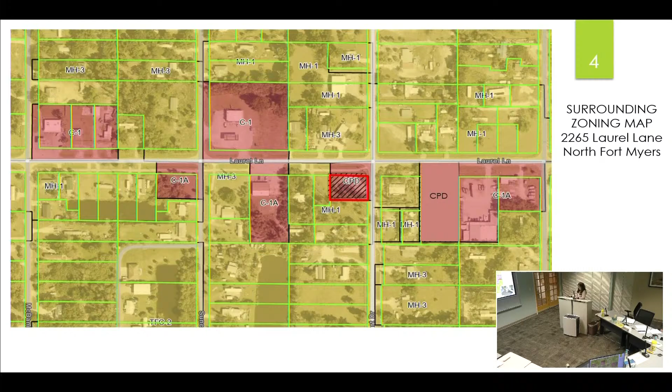The property has a future land use classification of suburban, as shown in the gold. The surrounding properties also have the same future land use classification. Surrounding zoning consists of MH1 and C1A to the west, MH3 and C1 to the north, MH1, CPD, and C-1A to the east, and MH1 to the south.

I did an exhibit for proximate commercial uses along Laurel Lane, which is identified as a major collector road in this area of Suncoast Estates. Commercial uses have been located along Laurel Lane to serve the community through rezonings, both conventional and planned development. Nearby uses consist of gas stations, convenience stores, food stores, and markets. There's a car care center and a roofing contractor, and several properties with commercial zoning that are vacant at this time.

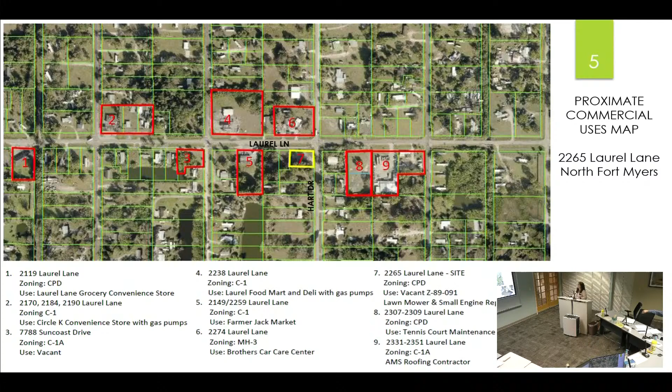AMS Roofing? Yeah, that was adjacent to this site, right? No, was it that, or was it adjacent to another one? It was one that we did. Yes, this one, I rezoned. Tennis court maintenance facility, that's us, we did that one too. That was me as well. Same team. So this little cluster of lots is turning into a node there. Yes, it is.

The applicant did propose a very limited schedule of uses, removing the previous use of lawnmower repair shop. He intends to develop the property as a food market, which will include carry-out prepared foods. The primary use is food store group 1, with ancillary uses of restaurants limited to carry-out only, an ATM machine, signs, fences, and essential services.

The master concept plan has been designed for the proposed use with the neighborhood and the existing neighbors in mind, and to comply with the requirements of the Land Development Code to the maximum extent possible. The lot is only 0.33 acres, which is 14,500 square feet. The proposed building is 2,000 square feet with a maximum height of 30 feet.

Is the plan for like just a little neighborhood grocery market? Absolutely. We did provide a minimum of 40% open space, which is double the 20% required for a small commercial development. Access to the property is going to be from Hart Drive, with the driveway located as far south of the intersection as possible. The building is located along the west property line and will have 2 public facades, one facing Laurel Lane and one facing Hart Drive. A total of 8 parking spaces are provided, along with pedestrian access internal to the site and along both Laurel Lane and Hart Drive.

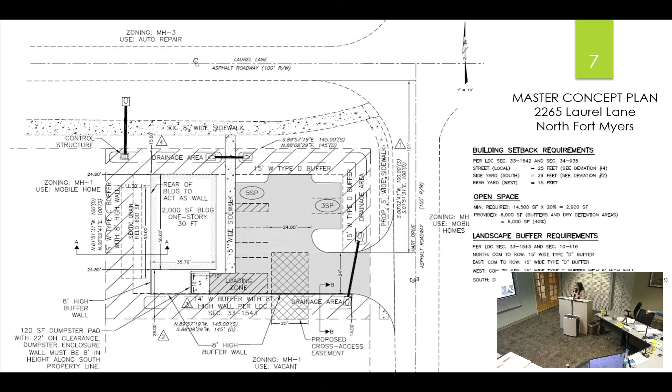That concludes the presentation of the master concept plan. I want to turn this over to Dean, who's going to talk to you about and present the traffic impact study, the drainage plan, and utilities for this site. And then I will wrap up with the Lee Plan compliance and answer any questions you may have.

Good morning, Dean Martin with TDM Consulting. I've previously been accepted as an expert in civil site design and would like to be considered again today. Yes, please proceed. Great, I want to briefly discuss traffic, drainage, and utilities.

As previously stated, we are proposing a full access driveway on Hart Drive. It's a full access connection. Hart Drive is a county maintained collector with a posted speed limit of 30 miles an hour.

Per the 11th edition of the ITE trip generation manual, using land use code 851 for convenience stores, the property generates 140 peak trips in the AM hour and 110 in the PM peak hour. But using pass-by allowances allowed by Lee County Land Development Code, we reduce the trips actually generated on the road down to 69 for the AM peak and 54 for the PM peak.

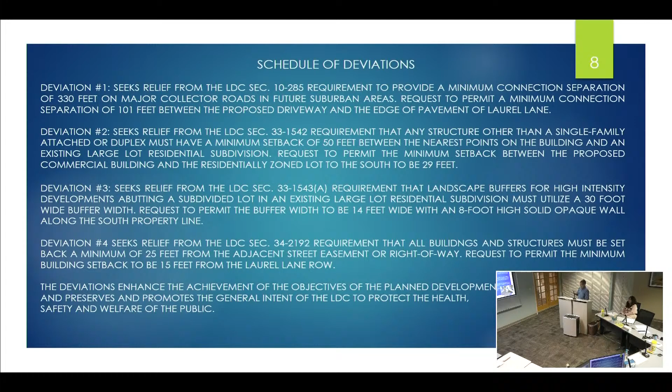I imagine you'll get a fair amount of foot traffic too, given the composition of that area. I did a site visit yesterday, and it seems as though given the use that's requested, a number of the residents in the area might just walk over.

I agree, and I think these numbers are a little exaggerated based on the ITE manual because these are done in more urban environments typically. So I think 140 trips, 110—if we generate that much, I think he's going to need to go a second story or expand because...

Well, you did a very conservative evaluation at 2,240 square feet. It's actually smaller than that. Correct, we didn't change it. So it would be a little bit less, not substantially less, but a little less based on the current square footage of 2,000.

It'd be down to maybe 120 and 100 for the peaks, and below that around 60 and 50. Given the character of the area, it seems like you'll have a fair amount of foot and bicycle traffic. And there's a nearby bus stop, so it's easily traversed by pedestrians and bicyclists, yes.

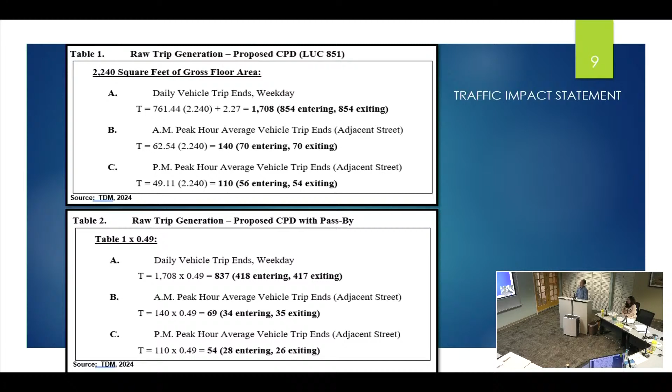As shown on the MCP on the screen, all stormwater runoff from the impervious surfaces will be routed to the proposed interconnected dry detention areas. Once water quality is achieved, we have proposed a control structure at that location that discharges to a roadside swale existing along Laurel Lane. We believe we'll be meeting the water quality requirements for the county given these interconnected detention areas.

If we don't, we'll provide supplemental underground storage chambers to supplement the above ground system. When is that determined? During the DO, it depends on several factors: soil storage, where the water table is, and we just haven't gotten that far during zoning. But we think this is enough.

Right now the plan is perimeter dry detention areas graded to this control structure, which then outfalls onto the roadside swale. Correct. Even if we do the underground chambers, they'll be in the parking lot, so the first flush will go into the chambers, and then it'll outfall into the surrounding area, complementing and supplementing the surface drainage.

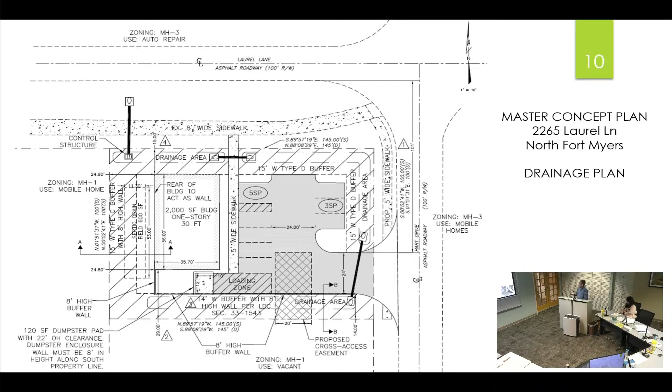As stated earlier, we are proposing a septic system for this site because the nearest force main is 2,600 feet south on Zoysia Lane, or roughly the same distance west over to Old 41 on this side. So it's pretty far away.

It's more than a quarter mile, more than half a mile actually. So we need to propose the septic system, and as soon as we get access to public sewer, we would love to abandon it and tie into it, but that's just not feasible at this point. The estimated demand is pretty low, 400 gallons a day based on 2 restrooms inside the store.

For potable water, there's a Lee County Utilities potable water main on our side of Laurel Lane that we'll tie into for domestic water. And the building being so small will not be sprinklered at this point. That concludes my presentation, unless you have any questions. I don't, thank you. Okay.

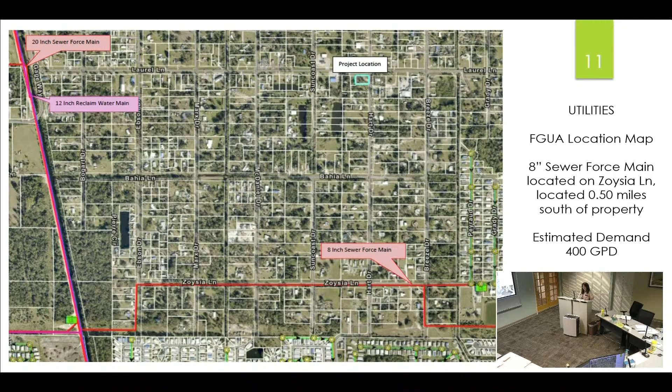Veronica, you had mentioned that there would be a condition that the west-facing wall on the side of the building would act as a buffer wall, with no doors or windows. I was looking at the list of conditions and did not see that included. Did I miss it? In the conditions, in the staff report? Oh, under environmental, okay. You found it quicker than I did. Okay, guess I wasn't expecting to see it there.

The site does comply with the comprehensive plan. This site does have a future land use classification of suburban, which is predominantly residential but does permit commercial uses to serve the local community. Nearby uses include both residential and commercial, as previously shown on the proximate commercial uses map.

Amending the CPD to permit the proposed use of food market is consistent with policy 1.1.5, objectives 2.1, development location, and 2.2, development timing, promoting contiguous and compact growth patterns to contain urban sprawl, minimize energy costs, conserve land, water, and natural resources, and direct new growth to areas where adequate public facilities exist.

Policies 2.2.1 and 2.2.2 evaluate rezonings on the availability of adequate road networks, central water and sewer lines, community services and facilities such as schools, EMS, fire, and police protection, and other relevant factors that would affect the public health, safety, and welfare of the community.

Both Laurel Lane and Hart Drive are major collector roads. The addition of the development will not degrade the level of service of the roads, which you heard from Dean. Fire, police, and EMS are located within 4 miles of this site. Public transit is located on Laurel Lane, and public parks and schools are within proximity to the site.

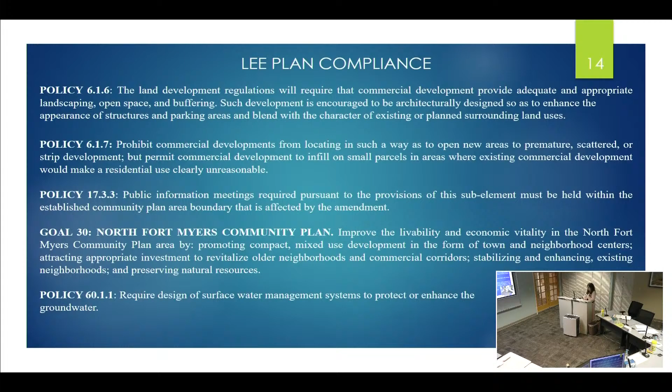Suncoast Estates is one of those older communities with a mix of mobile homes and commercial uses. It has been identified as an opportunity zone, the purpose of which is to spur economic growth and job creation in low-income and distressed communities that need revitalizing. Amending this CPD to permit a food store in this community does create employment opportunities. This is consistent with Lee Plan Goal 30.

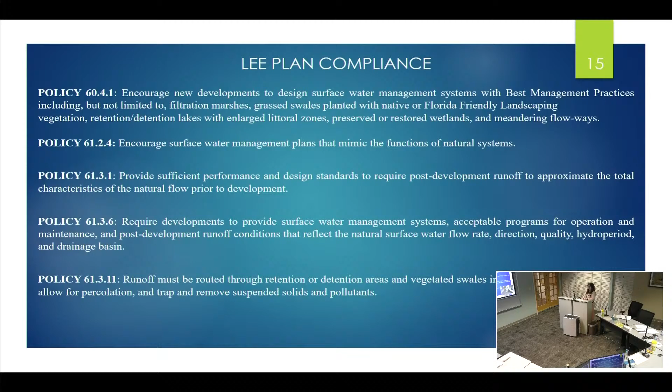This site will be designed utilizing best management practices for surface water management at the time of DO permitting. The property is not located in a flowway, nor does it contain wetlands. This subject property is under 1 acre in size, so it will be developed as a small project, which will not require permitting through South Florida Water Management District. Paving, grading, and drainage plans will be included with the site construction plans for the DO and reviewed by staff for consistency with the requirements of the Land Development Code, the Lee Plan, and any other regulatory agencies.

This is consistent with Lee Plan policies 60.1.1, 60.4.1, 61.2.4, and so forth. In conclusion, we believe the applicant has proven entitlement to this amendment request. The request does comply with the Lee Plan, it meets the Land Development Code and other applicable county regulations, or qualifies for deviations.

It is compatible with existing uses and planned uses in the area. The access is sufficient to support the proposed development intensity. The expected impacts on transportation facilities will be addressed by existing county regulations and conditions of approval. It does not adversely affect environmentally critical or sensitive areas and natural resources. It is served by urban services.

In addition, for the planned development, the mix of uses is appropriate at this proposed location. The recommended conditions provide sufficient safeguards to the public interest and are reasonably related to the impacts expected from the proposed development. The deviations requested do enhance the achievement of the objectives of the planned development, and they preserve and promote the general intent of the Land Development Code to protect the health, safety, and welfare of the public.

That concludes my presentation. I will provide the revised master concept plan to you by end of day today, and I can answer any questions you might have.

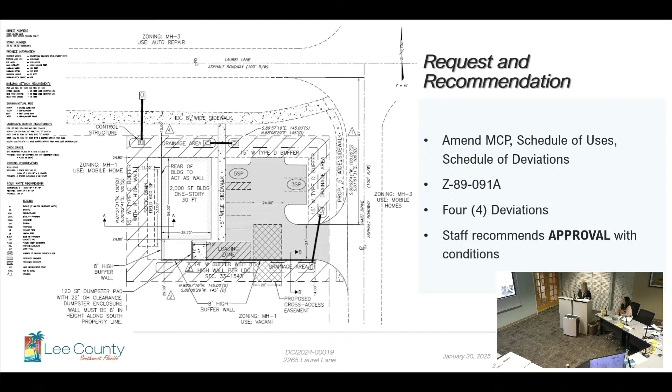Some background information on the property. The subject property, again, located at 2265 Laurel Lane in North Fort Myers. It consists of one strap number within the North Fort Myers Community Plan area. It is within the suburban future land use category and is currently zoned commercial plan development.

A little history on the parcel. The subject property is located within the Suncoast Estates platted subdivision, an older mobile home park, originally zoned by a special permit for a trailer subdivision by Resolution Z-62-039. As Veronica indicated, it has been identified as an opportunity zone, and historical uses of the Suncoast area are for mobile home residents. Permitted commercial uses exist along the major roadways within Suncoast Estates, alongside existing residential neighborhoods, including along Laurel Lane.

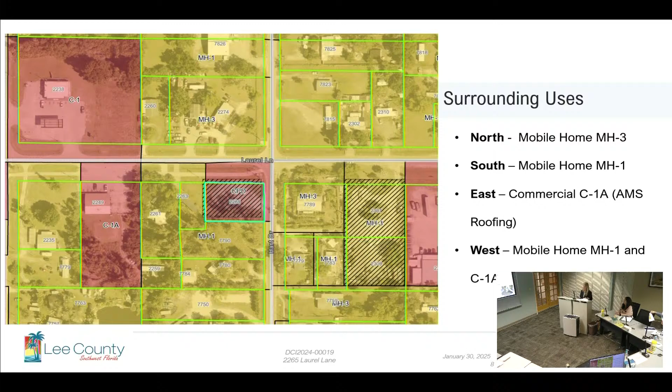Some surrounding uses to the property. They are near existing residentially and commercial zoned properties. Lots abutting the property to the south and west are zoned mobile home MH1, and 2 lots to the west of the subject property at 2249 Laurel Lane are zoned commercial C1A and are developed with a convenience store already. Properties to the north across Laurel Lane and east across Hart Drive are zoned mobile home MH3.

For the plan development amendment criteria covering Lee Plan LDC section 34-145, the following slides will demonstrate how the applicant has met the listed criteria. As previously mentioned, the property's future land use designation is suburban, part of the future urban and suburban areas. Pursuant to Objective 1.1.5, the project site is in a designated area for varying intensities that provide for a full range of urban activity, and commercial uses are permitted in the suburban future land use category to serve the local community, with nearby uses including both commercial and residential. The applicant has provided a master concept plan that depicts the conceptual development and includes proposed buffers and development standards intended to ensure compatibility with those surrounding uses.

Pursuant to Objective 2.1, the proposed amendment will allow development of an infill project that promotes compact growth patterns. Objective 2.2 and Policy 2.2.1 discuss new growth in future urban areas where adequate public facilities exist. As Veronica mentioned, the property is located along the 2-lane collector road of Laurel Lane. Existing infrastructure of water and sewer is in place, and utilities are available to the site. Adequate public facilities, including fire, police, public parks, solid waste, and utilities, are available to the site, and there are also public schools and parks that serve the property.

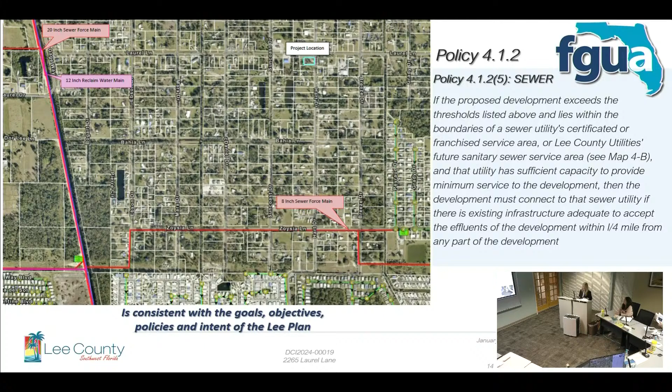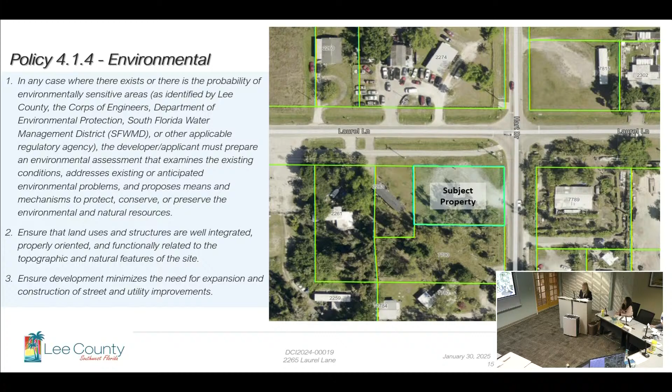For 4.1.4 environmental, the applicant has provided the required protected species survey and affiliated environmental maps. The subject property is cleared and routinely mowed and has been surrounded by development, providing sufficient evidence that no environmentally sensitive areas exist.

For objective 5.1.5, the applicant's MCP was designed to account for the existing surrounding residential uses and protects the residential areas from any uses that are potentially destructive to the character and integrity of the residential environment.

The LDC does provide buffer, setback, screening, and architectural requirements to minimize negative impacts associated with commercial uses abutting a residential neighborhood. The applicant has requested a deviation from LDC section 33-1542, which requires a minimum 50-foot setback for commercial structures abutting residential uses, to allow for a 29-foot setback to the south abutting a large lot subdivision.

In addition, a deviation from LDC section 33-1543A, which requires a 30-foot buffer width when high-density development abuts an existing large lot subdivision. They'd like to allow a 14-foot buffer along the south property line with an 8-foot high solid opaque fence, with all required vegetation on the outside of the fence.

The applicant has requested a 15-foot setback to the west, and county staff has recommended a condition that prior to development order, the MCP must depict that 15-foot type C buffer and a wall on the western side of the lot, with no windows or doors along the west facade of the building, ensuring an enhanced buffer to that residential use to the west.

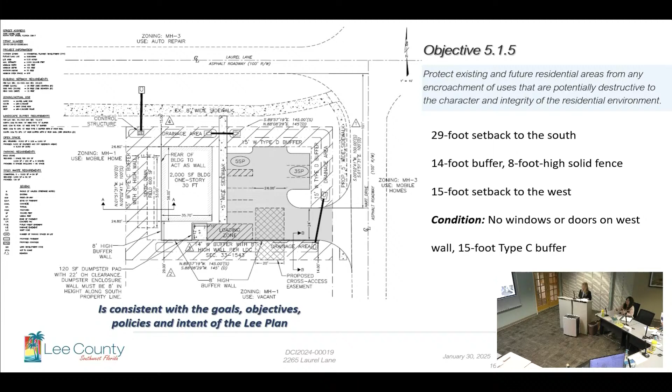Goal 6 of the Lee Plan for commercial land uses seeks to permit orderly and well-planned commercial development at appropriate locations within the county. As already established, the property is located within an established neighborhood with nearby existing commercial zoning districts, including CPDs, C1 and C1A. Access to the proposed development will be facilitated through one access point on the county-maintained major collector roadway of Hart Drive.

The Lee County DOT did provide a transportation analysis report stating the project is not anticipated to adversely affect the surrounding roadway system. Again, adequate landscaping and buffering will be provided at time of development, and urban services such as potable water, sanitary sewer, fire, EMS, and police protection are available to serve the proposed development.

Reuse water is available to serve? I'm sorry? Did you say reuse water? No, I thought you said potable. Yeah, no, potable water and sanitary sewer. Potable water. Yeah, potable. Okay.

For Goal 30, regarding the North Fort Myers Planning Community Plan area, as previously discussed, properties are located in Suncoast Estates, an older neighborhood comprised of a mix of residential mobile homes and commercial development. Suncoast has been identified as an opportunity zone, and the proposed development is an infill project promoting compact and mixed-use development, investment to revitalize the neighborhood, and further provides for mixed development. The business creates employment opportunities for the surrounding community, consistent with Goal 30.

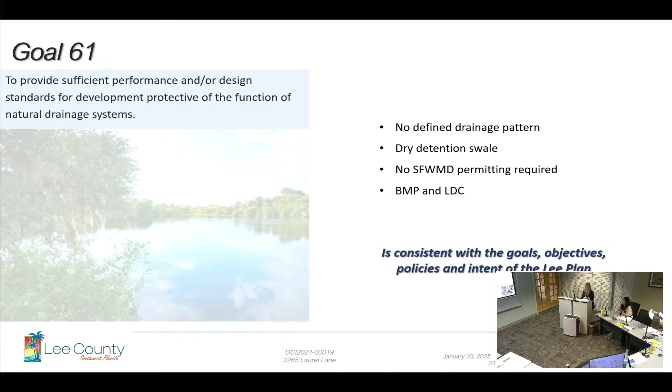For meeting the code and other applicable county regulations, the applicant has acknowledged that at the time of development, land development code and other applicable county regulations will be required and considered. The applicant has requested and justified the following 4 deviations for plan development.

Deviation 1 seeks relief from LDC section 10-285, which requires a minimum connection separation of 330 feet on major collector roads in a future suburban area, to allow a minimum connection separation of 101 feet between the proposed driveway on Hart Drive and the edge of pavement of Laurel Lane. Laurel Lane is located along the north side of the property, and the subject property is only 100 by 145 feet, making compliance with this 330-foot connection separation impossible.

Historic aerials indicate a previous driveway located as far south on Hart Drive as Laurel Lane, and there are only other residential driveways in proximity to the subject property on Hart Drive.

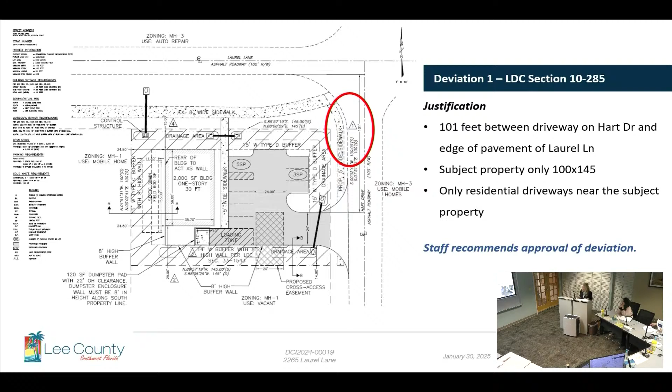LCDOT staff requested a cross-access easement to the property directly south to facilitate cross-access in the event that property is rezoned for commercial use in the future. The proposed cross-access easement will provide an interconnection and reduce access points on Hart Drive.

Staff did recommend approval of this deviation. Deviation 2 seeks relief from LDC section 33-1542, which requires any structure other than a single-family, two-family attached, or duplex, or its associated accessory structures, to have a minimum setback of 50 feet between the nearest point of the building and an existing large lot residential subdivision. The request is to allow a minimum setback between the proposed commercial building and the residentially zoned lot to the south to be 29 feet.

The abutting lot to the south meets the definition of an existing large residential lot per LDC section 33-1537. The minimum required setback for the proposed buildings are 50 feet to the south, 25 feet to the north and east on those right-of-ways, and 15 feet to the west. Again, the subject property is only 100 by 145 feet. That only leaves a space of approximately 25 by 105 feet deep for a building.

However, those building dimensions do not allow the development to comply with other requirements of the LDC, like parking, drainage, access, and buffers. Complying with the 50-foot setback to the south property line would create such a small building footprint that it would prevent the applicant from reasonable use of their land.

Per LDC section 33-1543, the buffer vegetation required between commercial developments and existing large lot residential subdivisions is enhanced, providing more mature trees and shrubs at time of installation, as well as an increase in the number of trees and shrubs. The vegetation, in addition to the 8-foot high solid opaque wall, will shield the residential lot from the commercial use. Trees and palms are required to be clustered in double rows with a minimum of 3 trees per cluster, and canopy trees must be planted a maximum of 20 feet on center. Palms must be planted in staggered heights with a minimum of 3 palms per cluster, spaced at a maximum of 8 feet on center, with a minimum 4-foot difference in height between each tree. All shrubs must be a minimum of 10 gallons, 4 feet in height, with a 3-foot spread, planted 4 feet on center at installation time.

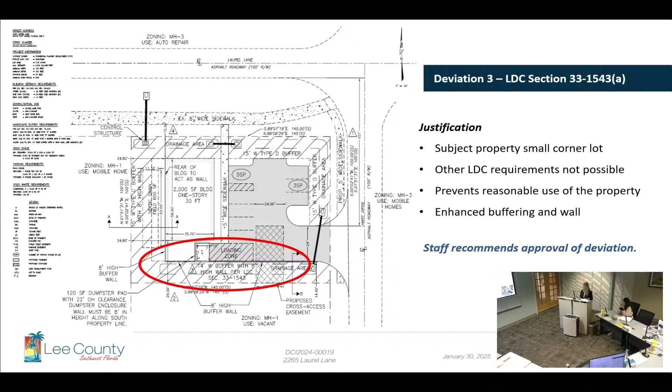Deviation 3 seeks relief from LDC Section 33-1543, which requires landscape buffers for high-density or high-intensity development abutting a subdivided lot in an existing large lot residential subdivision to utilize at minimum a 30-foot wide buffer width. The request is to allow the buffer width to be 14 feet with an 8-foot high opaque wall to the south property line. Again, the lot is small, it's a corner lot. These buffer requirements are already enhanced, therefore the deviation is approved.

Deviation 4 seeks relief from LDC Section 34-2192, which requires all buildings and structures be set back a minimum of 25 feet from the adjacent street easement or right-of-way. The request is to allow a minimum building setback of 15 feet from the Laurel Lane right-of-way. Again, as with the other deviation requests, these requirements on a small corner lot prevent other LDC requirements and reasonable use of the property. The applicant is proposing to provide a 15-foot building setback to Laurel Lane along with the 15-foot wide buffer.

There is an existing 8-foot wide pedestrian facility along with a planting strip within the 100-foot wide Laurel Lane right-of-way, which provides an additional buffer between the road and the commercial development. The proposed 15-foot building setback permits the development to function as a small commercial development. Staff has approved the deviation with a condition that prior to issuance of a DO, a cross-access easement extending to the abutting property to the south must be depicted on the development order plans.

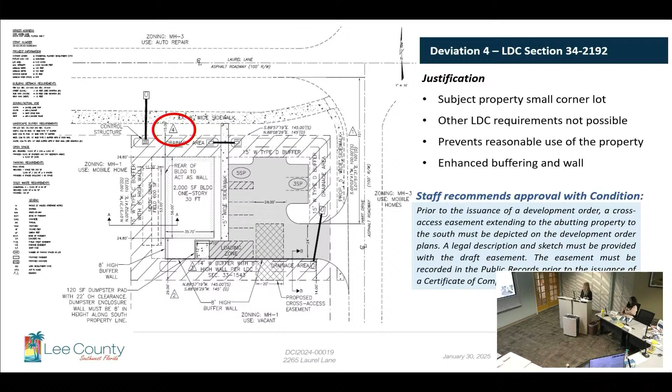For compatibility with existing and planned uses, it is located in an established neighborhood with other nearby existing commercial zoning districts. The schedule of uses is limited and includes accessory uses and structures, ATMs, essential services and essential services facilities, fences and walls, food stores group 1, accessory parking lot, restaurant group 1 and 2 for carryout only, and signs. All uses as conditioned are compatible with the surrounding uses.

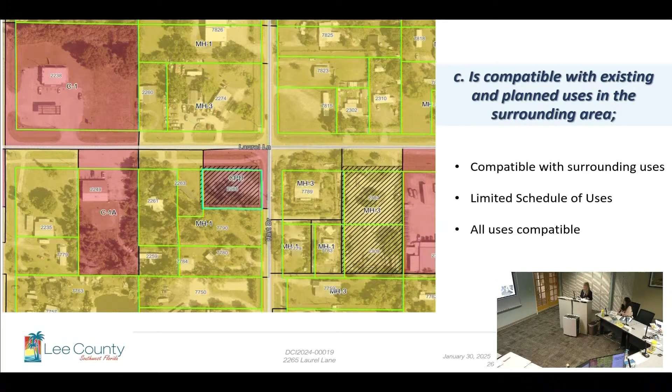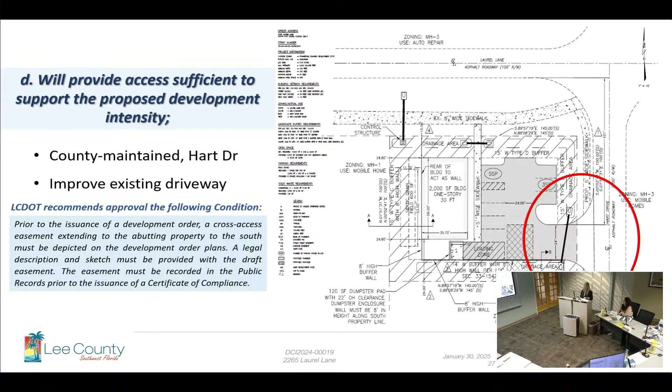For providing sufficient access, the proposed development will be facilitated through one access point on the county-maintained major collector roadway of Hart Drive, and the applicant proposes to improve the existing driveway that accesses from Hart Drive to the east. Lee County Department of Transportation did recommend a condition to limit that future access point on Hart Drive, along with the cross-access easement extending to the abutting property to the south.

So the expected impacts on transportation, I believe Dean covered this well. They have provided the required TIS. Access to the proposed development will be facilitated through that one access point on the county-maintained major collector of Hart Drive. DOT Transportation provided a transportation-related analysis stating no anticipated adverse effects will be on the surrounding roadway system.

For environmentally critical or sensitive areas, the request will not adversely affect them. Applicant provided the required protected species survey and affiliated environmental maps. The subject property is cleared and routinely mowed and has been surrounded by development, so environmentally sensitive areas are unlikely.

The applicant's provided surface water management plan narrative did indicate the property in its existing state has no defined drainage pattern and appears to sheet flow to Laurel Lane roadside swale without benefit of any water quality treatment or attenuation. County environmental staff did visit the site and provide a report analyzing the request. They made the following notes.

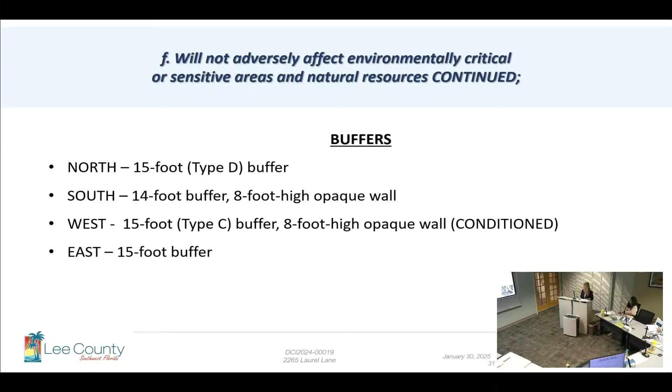The buffers, I won't belabor too much since we've covered that pretty well. To the north, a 15-foot type D buffer. To the south, a 14-foot buffer with an 8-foot high opaque wall. To the west, a 15-foot type C buffer with an 8-foot high opaque wall, with conditions provided that they don't put windows or doors on that wall. To the east, a 15-foot buffer.

The property will be served by urban services. They are served by LCU and FGUA, the North Fort Myers Shores Fire Protection and Rescue District, the Lee County Sheriff's Office, in addition to public transit, schools, and parks. The property is located within an established neighborhood with other nearby existing commercial zoning districts.

The recommended conditions provide sufficient safeguards to the public interest, and staff recommends approval of the 4 deviations, finding they do meet the criteria for approval. In conclusion, the request for the amendment meets the review criteria established in LDC section 34-145. Therefore, we do recommend approval.